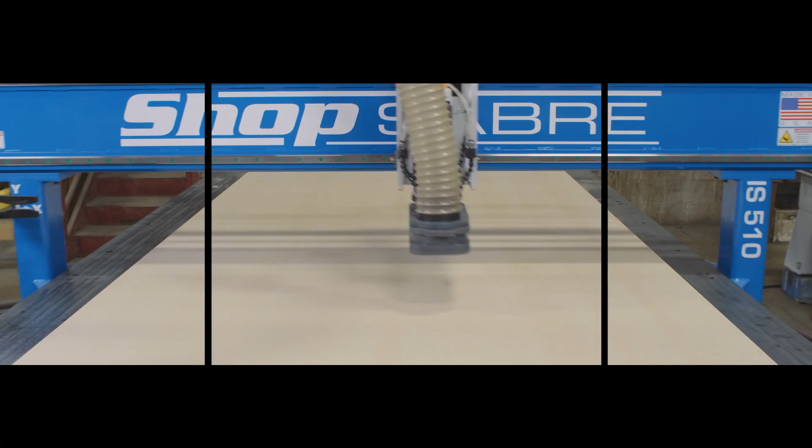For this project, we decided to incorporate some spider webs, pumpkins, and some spooky letters. We wanted this to be functional, yet keep the theme.

Before we jump into the software, let's talk about my backstory. I'm an engine builder machinist, I can build an engine in my sleep. Five years ago, I decided to do this. I was intimidated by the software, but quite frankly, it wasn't that bad. I learned it on my own, and I utilized ShopSabre's tech support to help me through it.

So let's go ahead and dive into this. Now we're in Enroute, let's talk a little bit about the design work. I had to think like one guy assembling and aligning this whole sign. Our fab department has multiple people, but only one guy assembled it. I did everything symmetrical and with tabs and slots. I used guidelines to help me through this process.

Guidelines are these lines here. You might ask yourself, well, how do I get a guideline? You take your cursor, put it over the top of the ruler, left click, and pull down. Now, if I want to put it in a specific spot or a specific angle, let me show you how easy that is. Right click on it, go to Edit Guideline.

Let's go ahead and make it at a 45-degree angle. We'll just go ahead and highlight that. We're going to go 45, tab that, and I'm going to come down here to rotate. I'm going to rotate it. You see how it's at 45 degrees.

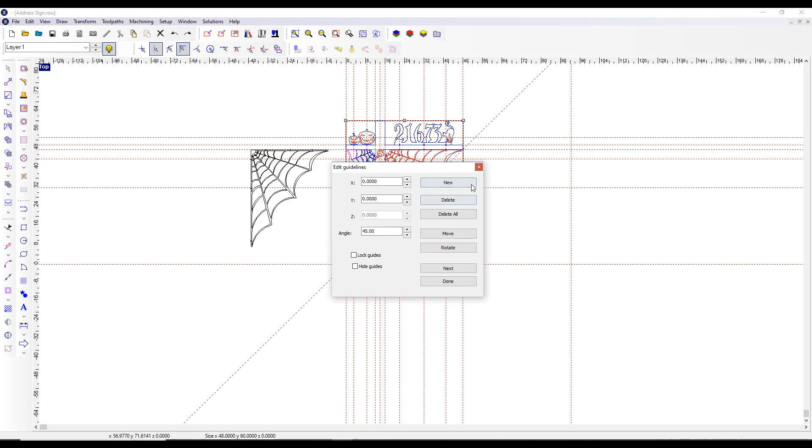Now let's say we want to put it on the bottom left-hand corner. All we have to do is just go 0, tab, move. If we take that and close this box down, you can see that it's at exactly 45 on the 0, 0 left point. We'll go ahead and delete that because we really don't need it right now.

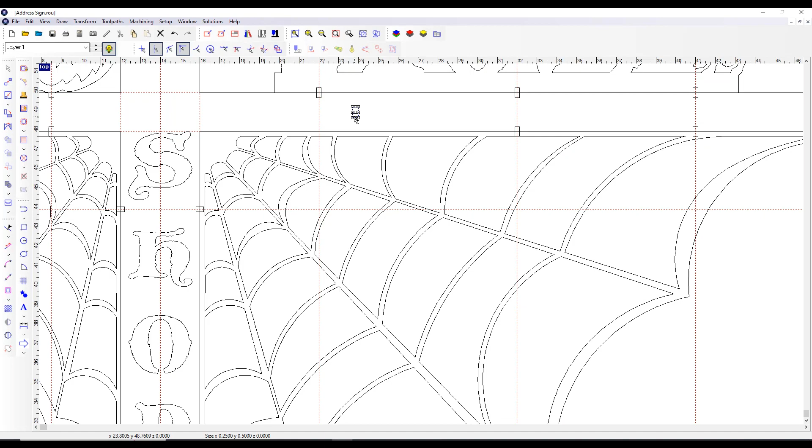Now, if you come up here, you can see that I use those guidelines right here with a snap, and we're going to go over it, snap the guideline. So if I take this piece here and left click it and highlight it, I can pull it away. If I want to bring it back in, all I have to do is just bring it there and it'll snap right to the center.

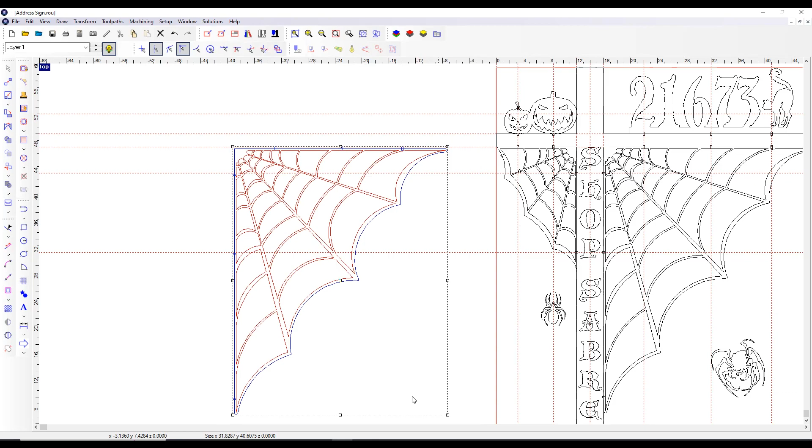So I copied and pasted that section right there. You'll note that these are not all attached. So how will we do that? Well, we go ahead and left click, drag over the top of it, highlight it, come over here to our weld tool, left click, and there we have it.

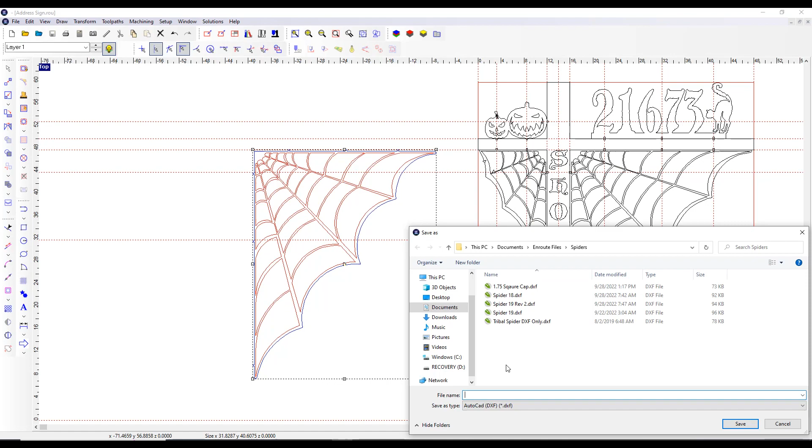I've already exported all these pieces already. Now what I want to do is export this one piece just to show you how easy it is. We're going to come up here, left click on the file, come down to export. We're going to use the spider here, just as a random file. All we have to do is space spider web and save. It's going to ask us if we want just that piece or the whole entire file. This particular time we want just that piece, and we're going to click OK.

Now we're all exported. What we'll do is jump into ProNest, and then we're going to jump into Rotary Tube Pro.

So now that we're in ProNest, let's start a new job. Now, I will caution you, I do have some of this done on the backside, so it doesn't take forever to do. So we're going to go over very quickly how this works. Select New. We're going to enter a job, Spooky, and we're going to use PowerMax 85. We're going to use 75 thousandths material, mild steel, and we're going to use the fine cut. Now, just very quickly, all you have to do is do the drop down and you can select what type of consumables you're going to use.

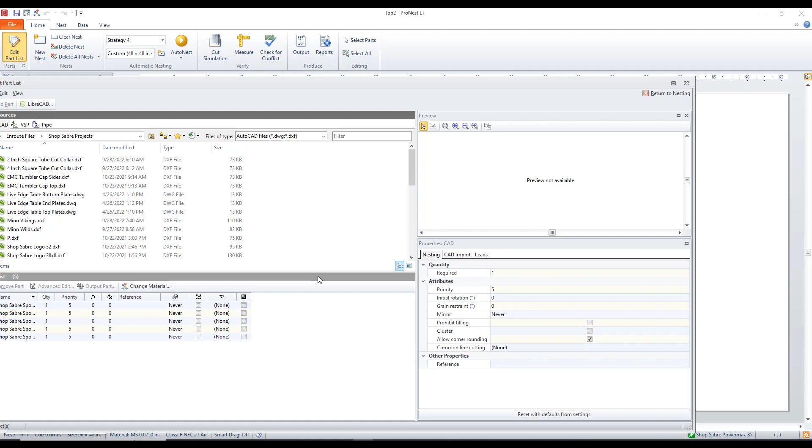I would normally hit create, but I've already created this. What we're going to do is come over here to home and open this back up, then go to edit part list. I've already pretty much put everything in there, but we're going to add one particular piece. So we're going to scroll and select our second spooky spider.

If we left click on it one time, that'll show us a preview. Double click it, and it will now put a toolpath on.

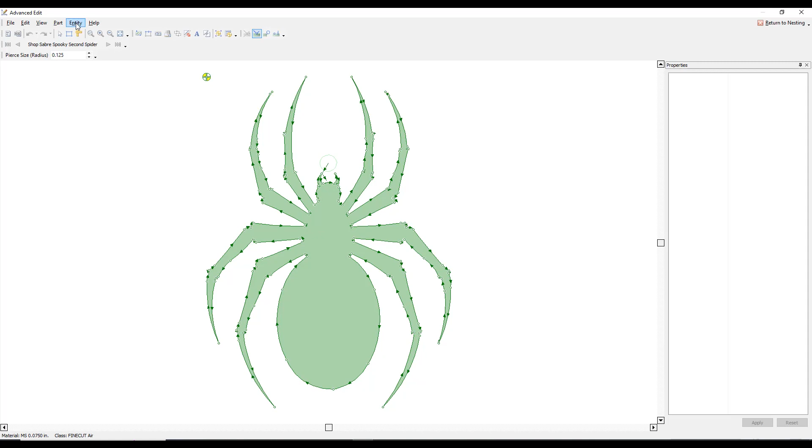So let's quickly take a look at Advanced Edit. Now this is only a small peek at what we can do. If we want to change where the toolpath's at, say we don't like that, all we have to do is go to Entity, Modify Lead, come over, click at the point we want to change it to, and there.

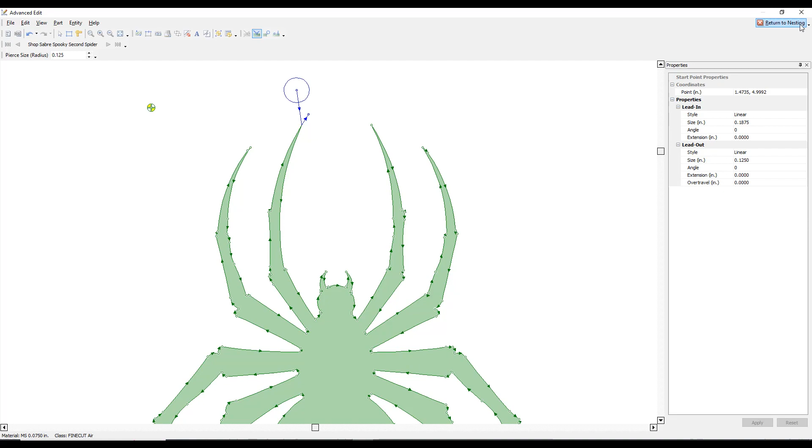Let's go ahead back to the nest. We're going to save that. We have all our pieces here. We can put a quantity in, but right now all we want is one.

We're going to go up here to return to nest. Now you see here we have all the pieces. We're going to go here to auto nest, left click it. We're a 48 by 48 machine. We're going to click OK, and it's going to auto nest. Now you'll notice how it places different pieces in all around, and it utilizes the space.

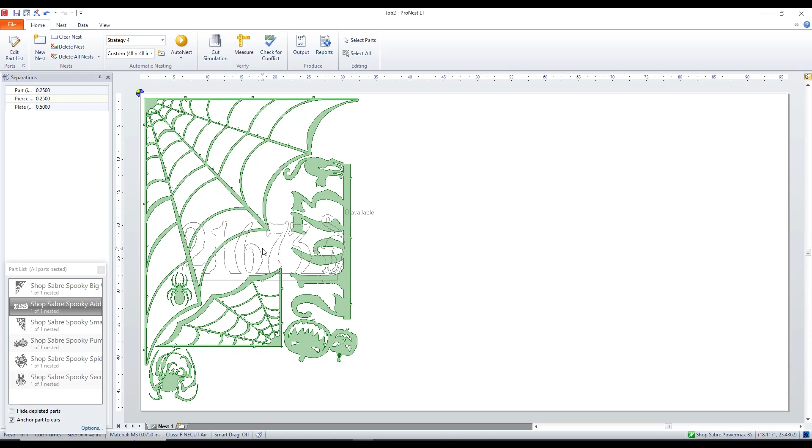I'm going to output this, and we're going to jump into Rotary Tube Pro. Now that we're in Rotary Tube Pro 3, we could talk about this all day, but I want to show you one thing that's unique to this project that helped it out. We added a branch. It made a through cut on both sides so that 2-inch square tube will go through the 4-inch. Now keep in mind, we used the 4-inch so we could clear under our high gantry. That helped out exponentially. So let's go ahead and get a branch in there.

We're going to right click on the branch, and add branch. You see a drop down box come up. We want our length of our horizontal tubing to be 48 inches, so we'll put 48 in there.

Now we're going to use square tubing. They use rectangle and square as the same thing, because the next box down below it, we're going to use the 2x2. We're just going to show you here. You can scroll down here and it does all the different types of tubing, rectangle and square.

Our width is 2, our height is 2, our wall thickness, well, we're going to want to change that down to 10 gauge because that's what we're going to be using. We're going to do a near side. If I go ahead and do this, you can see that that is not correct. We want to do the cut through.

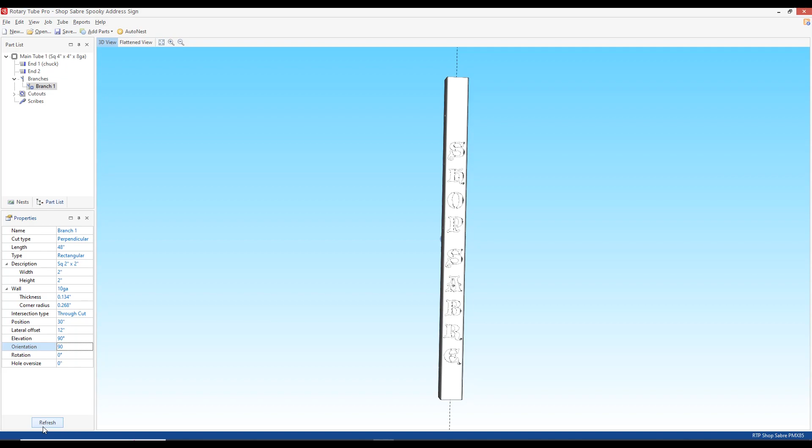We want to do a lateral offset of, let's say, 12 inches, and we're going to orientate that at 90 degrees. And we're going to refresh.

Now you'll notice that we're too low on the pipe or the square tube. What did we miss? Well, it's pretty simple. We got the position here. We want this position to be 49 inches from the actual bottom. So watch what happens now.

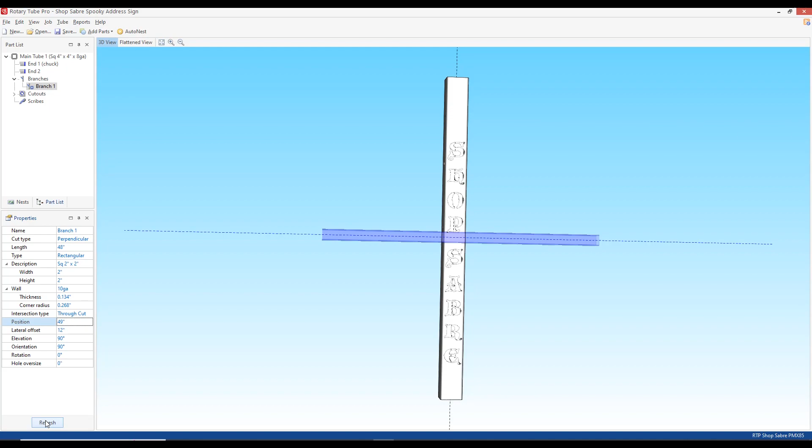We're going to click off of that and refresh. Now that we've got this piece right where we want it, this is one of the cool features about Rotary Tube Pro. We're going to export these files and get to cutting.